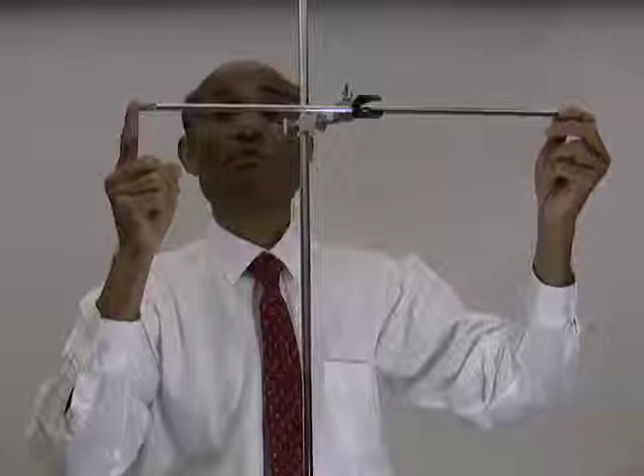No. Therefore, what is the condition that needs to be satisfied in this case? Well, the force I apply on the right side upward produces a torque, rotating this rod in the counterclockwise direction. It is a counterclockwise torque.

And the force that I apply downward here is also producing a counterclockwise torque. That means these two torques will add up to give you a net torque. If this has to remain in equilibrium, the net torque has to be 0.

So before we write these things down, let's talk about this one more time. When you talk about equilibrium of an object, the object may remain in a state of equilibrium with respect to translational motion, also with respect to rotational motion. In order that an object may remain in a state of equilibrium, the object should not have any translational motion—that means the sum of the forces acting on the object must be 0.

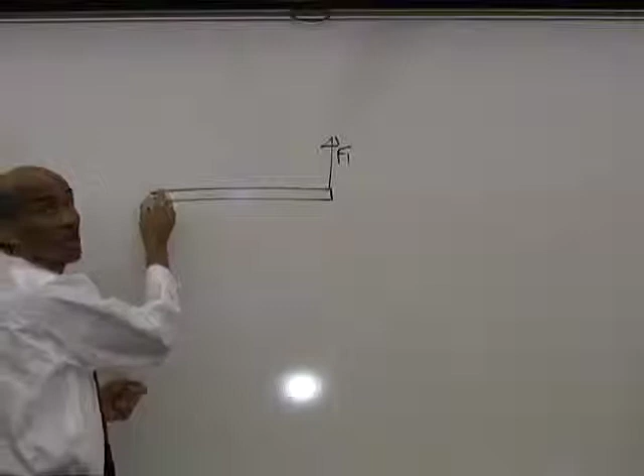Also, the object should not have a rotational motion. That means the sum of the torques of all the forces acting on the object, taken about any point, must be 0. Now, before we go on, let me see if I can draw that situation for you. If I have this object, a force, say F1, acting on this can produce a rotation on this object about this point A.

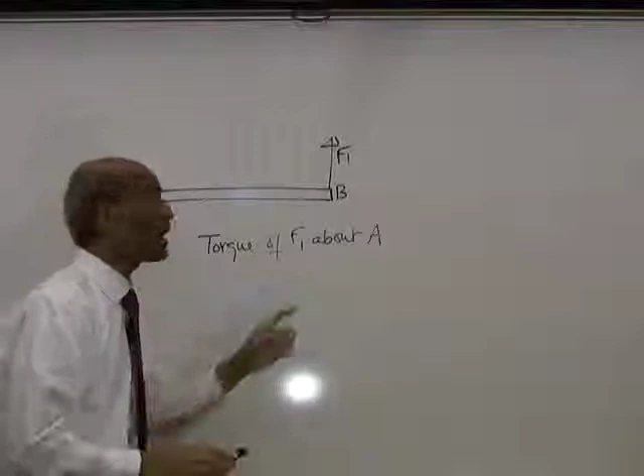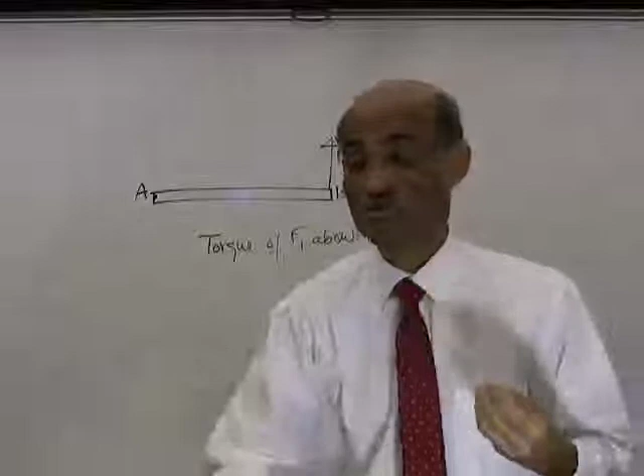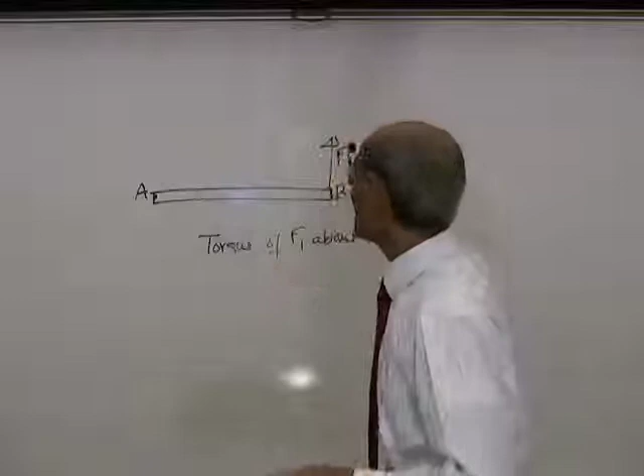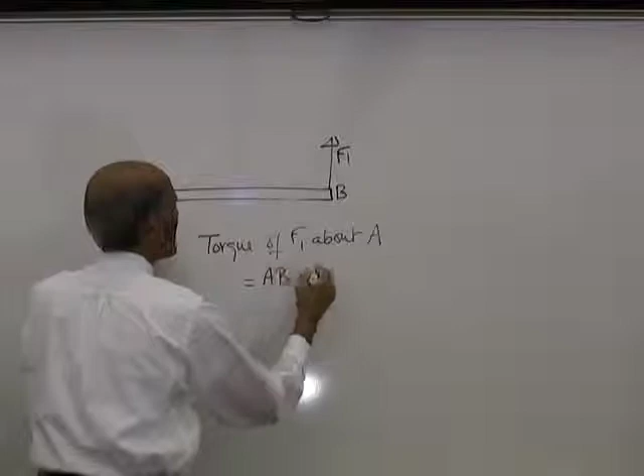The force is acting at point B. Now, what is the torque of F1 about point A? When I say the torque of F1 about point A, what I mean is the torque of the force F1 about an axis that passes through A. Remember, rotation always happens about an axis. So we want to find the torque of this force F1 about an axis that passes through A. What is the torque of a force about an axis? It is the force multiplied by the perpendicular distance between the force and the point. Therefore, this torque is the distance AB, that is the torque arm, multiplied by the force F1.

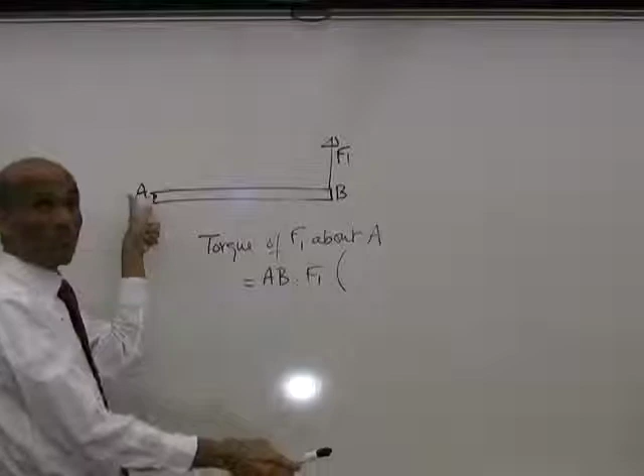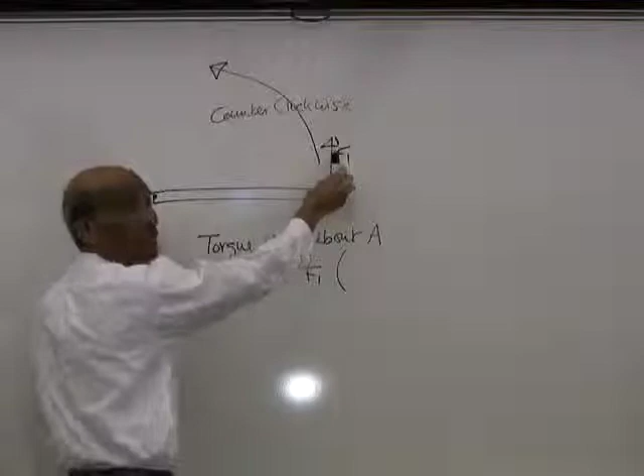Now tell me, what is the direction of this torque? A torque can produce a clockwise rotation or a counterclockwise rotation. I'm sure you can now distinguish between these two. Tell me, what kind of rotation is this F1 producing about point A? Watch my right hand - it will look like my left hand for you. I'm going to point at A, that is my fulcrum, that is where the axis of rotation is. Now look at the way F1 is going to rotate. F1 is going to produce a rotation in that direction. What kind of direction is this? This is counterclockwise. Alright, so we say this force F1 produces a counterclockwise torque about the point A.

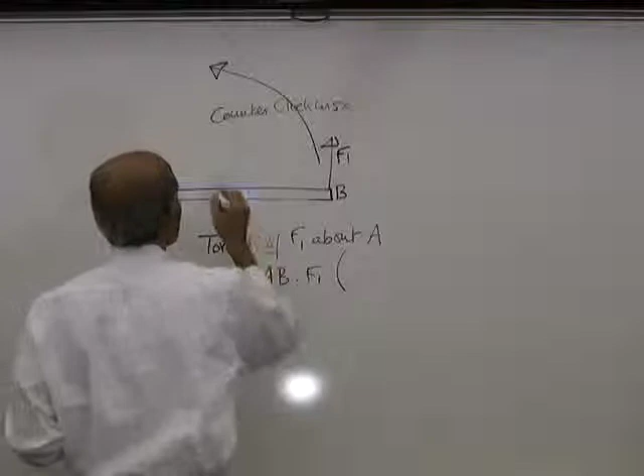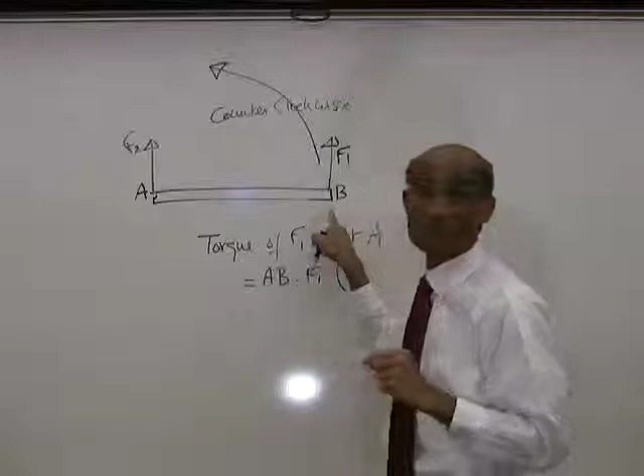Well, suppose I have a force F2 at point A. Tell me, what is the torque F2 can produce about point B? When I say about point B, I mean about an axis that passes through B. What is the torque of F2 about point B? The torque of F2 about an axis that passes through B, it will be the torque arm AB multiplied by the force F2.

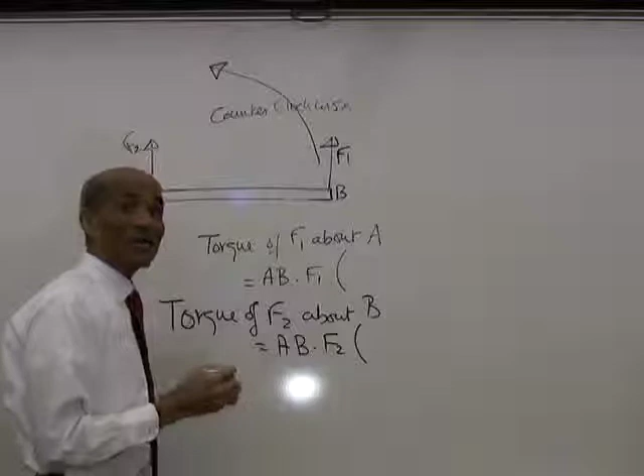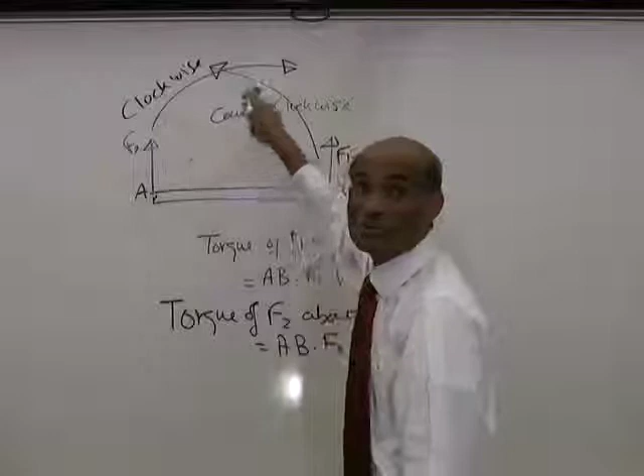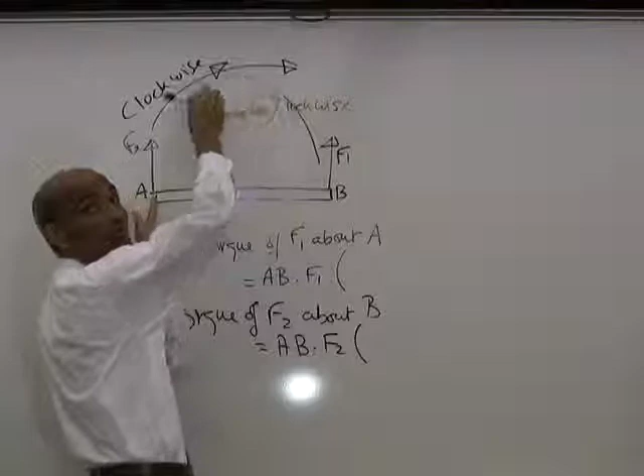Now tell me, what kind of torque is this? If I now hold my finger at B, that is the axis, and rotate the rod using the force F2, look at the way the rotation is going to take place. The rotation is going to be like this. It is a clockwise rotation, isn't it? That is the direction of motion of the hand of a clock. That means the force F1 can produce a counterclockwise rotation about point A, and force F2 can produce a clockwise rotation about point B.

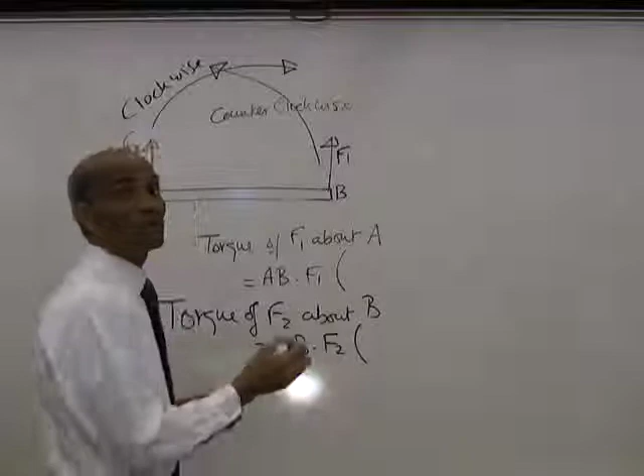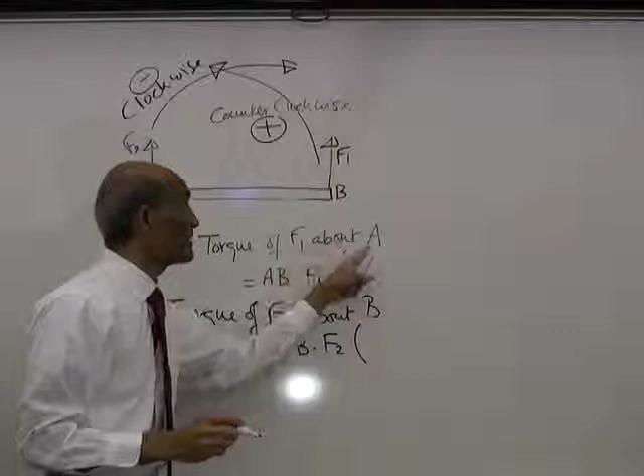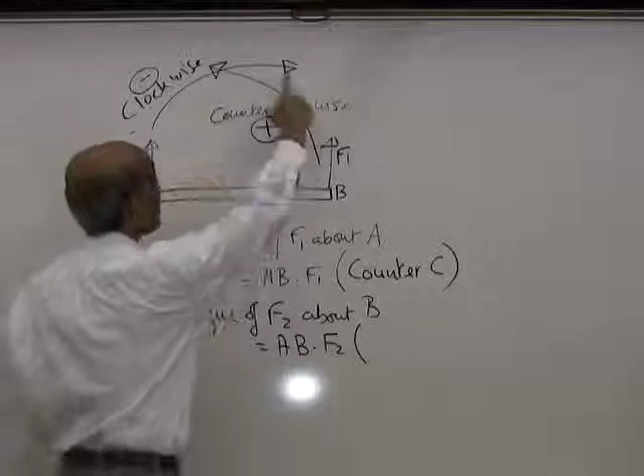That means these two torques oppose each other. So if one is positive, the other will be negative. We can choose which torque to call positive and which to call negative. For convenience, we're going to call the counterclockwise torque as positive and the clockwise torque as negative. So when you want to write the torque of force F1 about point A, it is a counterclockwise torque, therefore it will be positive. If I don't put a sign there, it means it is positive. Whereas the torque of F2 about point B will be a clockwise torque, and that will be negative. So I will now use a negative sign.

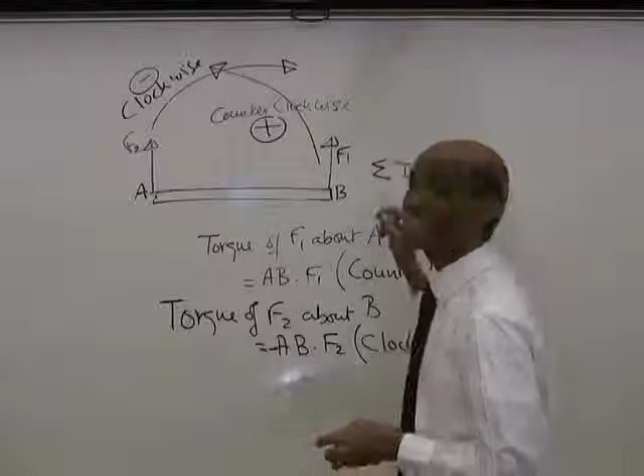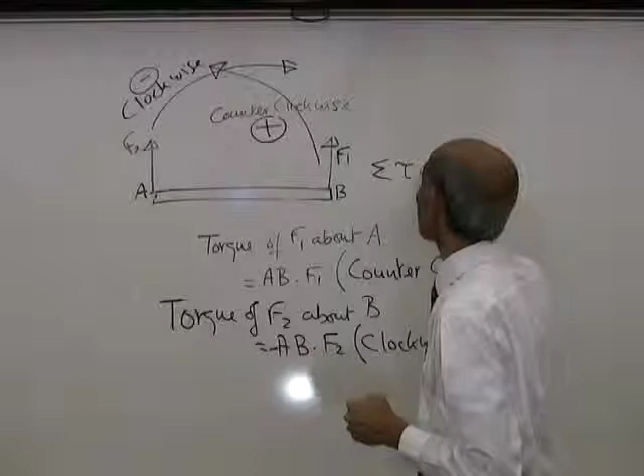Tell me, what is the sum of the torques due to these two forces? In other words, what is the summation of tau? Add these two torques. And if the forces are of equal magnitude, this sum will be 0. Now, if the sum of the torques equal to 0, that means the object will not rotate.

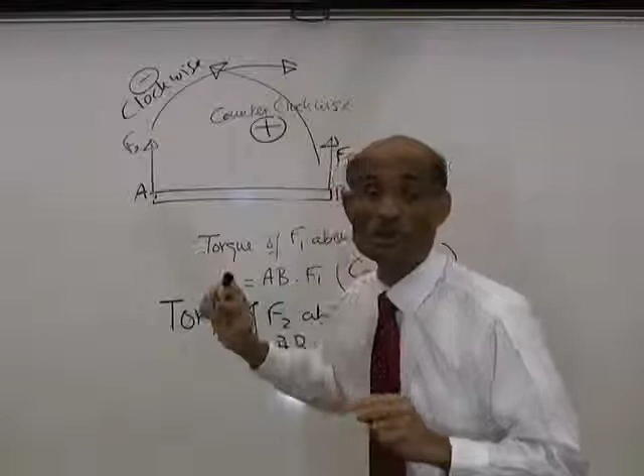So now tell me, what are the conditions under which an object will remain in equilibrium? The conditions are: the sum of all the forces acting on it must be 0, and the sum of the torques produced by all the forces taken about any point must be 0.

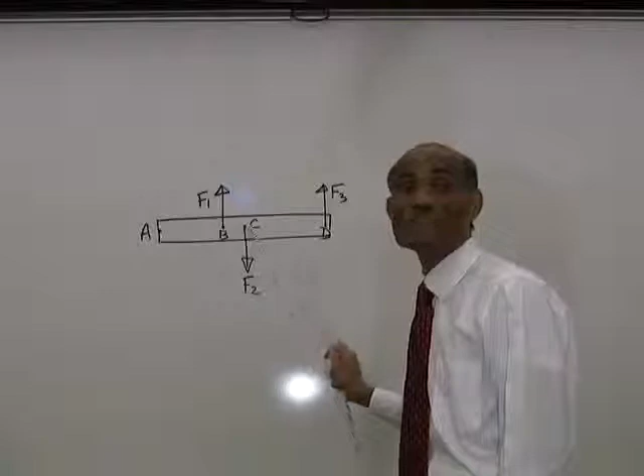Alright, let me try to explain. I have represented a beam here. There are points, I have marked A, B, C and D. And there are forces F1, F2 and F3 acting at points B, C and D. If this object has to remain in equilibrium, it means the sum of the forces must be equal to 0. Now, if an upward force is positive, a downward force is negative.

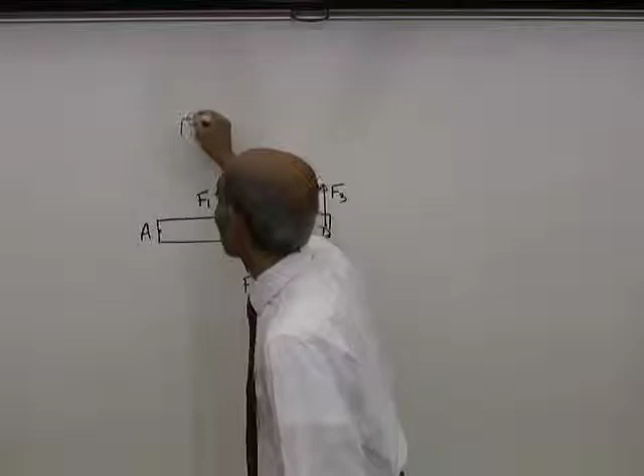So I can then write F1 plus F3 minus F2 equal to 0. This tells me that the sum of all the y forces equal to 0, forces in the y direction. Summation Fy equal to 0 gives me F1 plus F3 minus F2 equal to 0.

Well, that alone will not keep this object in equilibrium. What is the other condition that we need to satisfy?

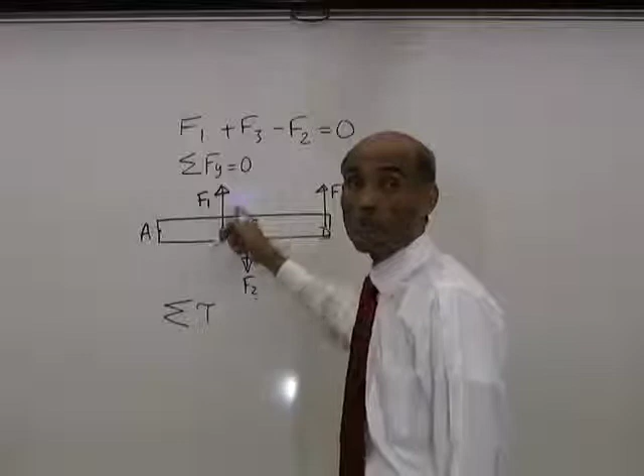We need to add the torques produced by all these forces taken about any axis, because the object cannot rotate about any axis. Here I can take an axis that passes through A, through B, through C, or through D. The object should not rotate about any of the axes.

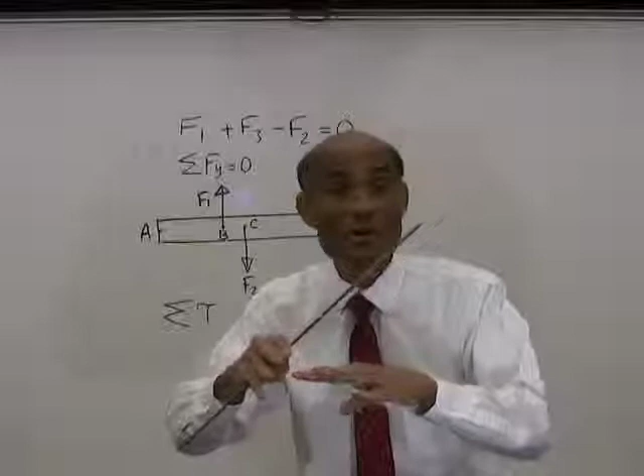That means if you take the torques of all these forces about any axis, the sum of all those torques must be equal to 0.

Now that means we can choose the axis of rotation. We can choose the axis about which the torques of these forces are going to be taken. Any point will be fine. If you choose any axis, the sum of the torques must be 0.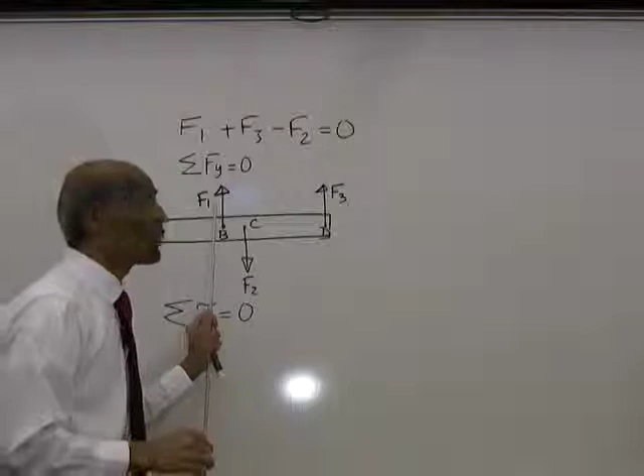Now tell me, what is the criteria for choosing the point? Let's see if you can answer this question. What is the torque of F1 about an axis that passes through this point B? Did you understand the question? What is the torque produced by this force F1 about an axis that passes through the point B?

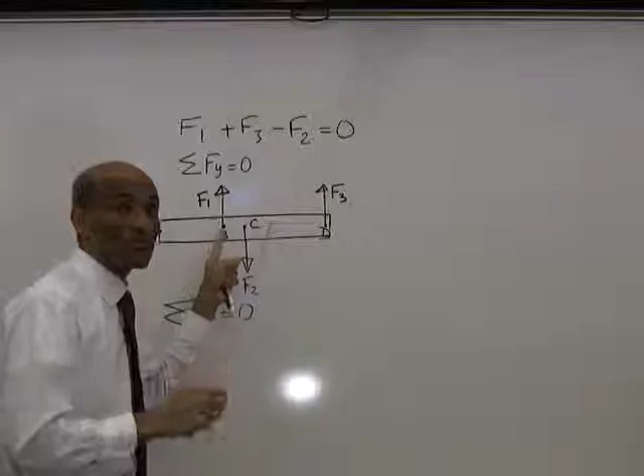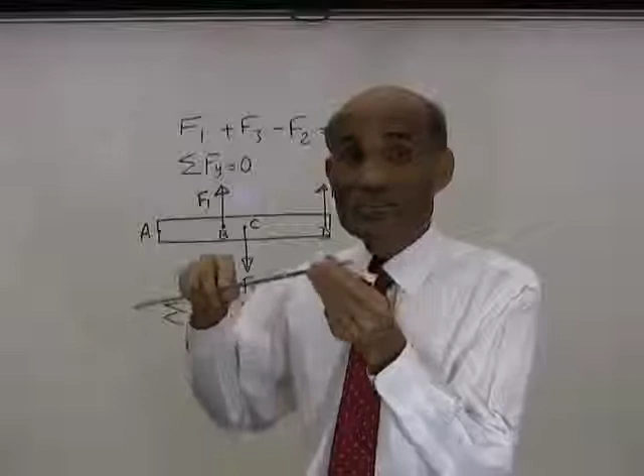Remember, torque is the torque arm multiplied by the force. And the torque arm is the perpendicular distance between the force and the axis of rotation. Now, you can see the axis passes through B, the force also passes through B. That means the torque arm there is 0. So, a very important situation: if a force passes through a point, then the torque of that force about an axis that passes through the same point is 0. It means the torque of F1 about B is 0.

The torque of F2 about C is 0. And the torque of F3 about D is 0. So, we can now take the torque of all these forces about any point.

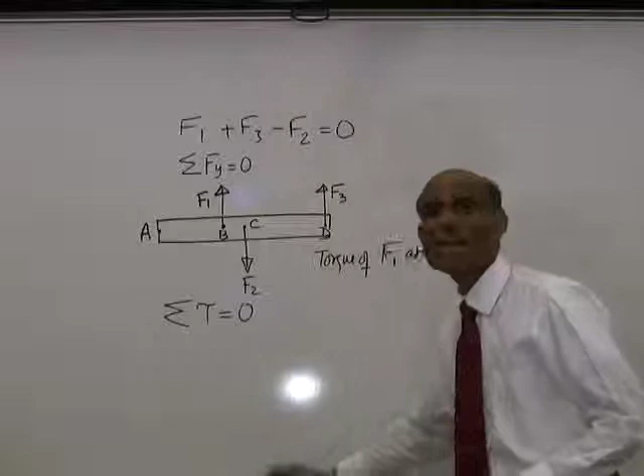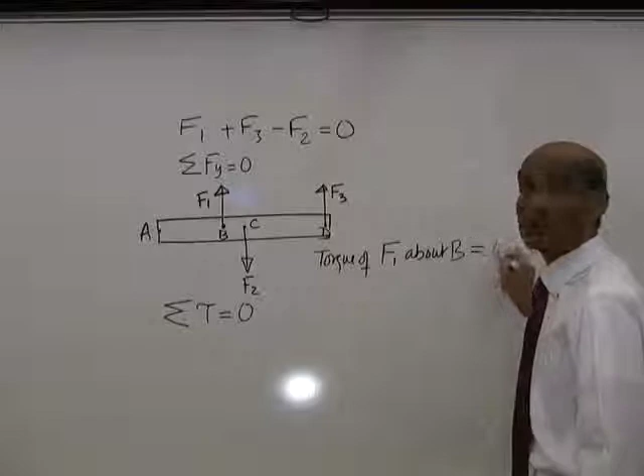Alright, tell me, what is the torque of F1 about an axis that passes through A? What is the torque of force F1 that passes through... what is the torque of F1 about an axis that passes through B? Let's take it about B. What is the torque of F1 about an axis that passes through B? That torque will be 0. Why? Because the torque arm is 0.

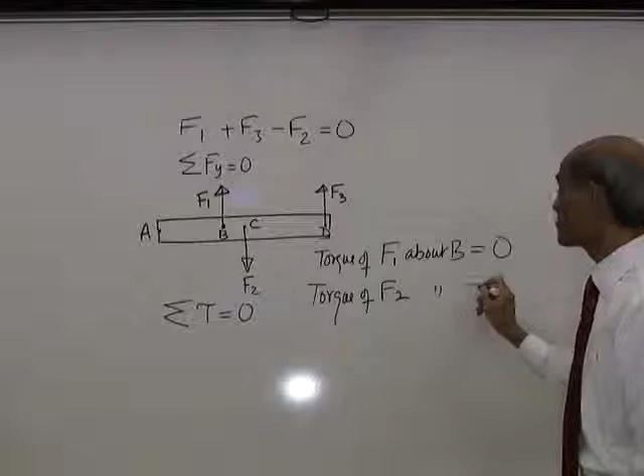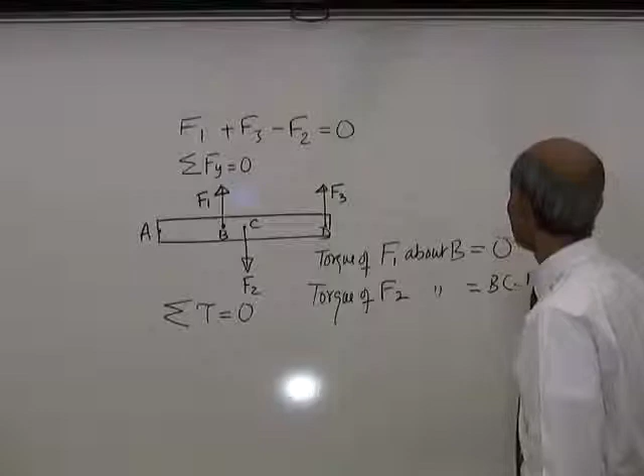Alright, what is the torque of F2 about an axis that passes through B? Torque of F2 about an axis that passes through B, that will be the torque arm, the distance BC, multiplied by the force F2. The torque arm multiplied by the force.

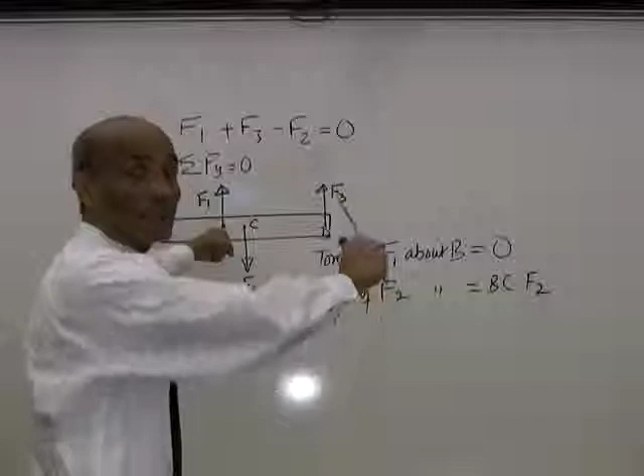Now tell me, is this a clockwise torque or a counterclockwise torque? Well, how do you know? What you need to do is use your index finger and point at the axis. My axis passes through B, there I'm pointing. And then draw a circle using the force around that axis. F2, the torque of F2 about the point B. Look at this. What kind of a torque is it? It produces a torque in the clockwise direction. So this is a clockwise torque, therefore it is negative. Isn't that fair to call that torque negative? It is a negative torque because it is a clockwise torque.

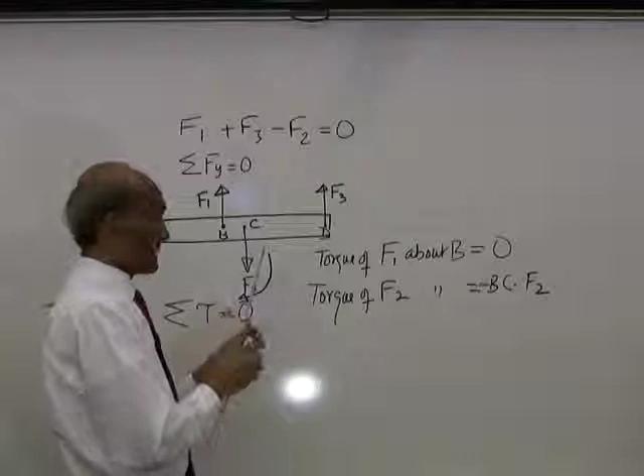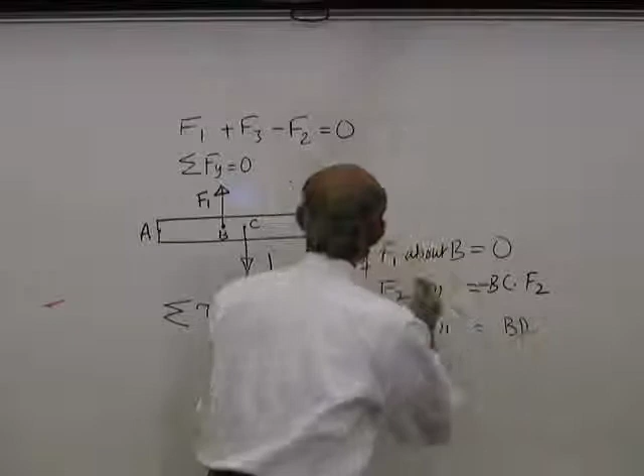Alright, now tell me, what is the torque of F3 about an axis that passes through B? Torque of F3 about an axis that passes through B will be the torque arm, that is the distance BD, multiplied by the force F3. So the torque of the force F3 about an axis that passes through B will be the torque arm, the perpendicular distance between the force and the axis, that is BD, multiplied by the force F3. Now tell me, is this a clockwise torque or a counterclockwise torque?

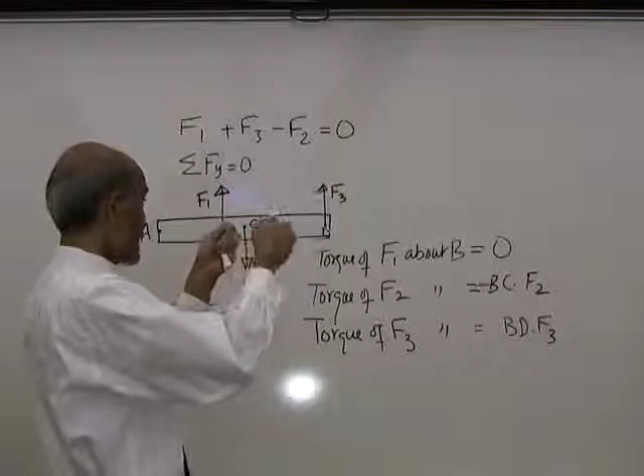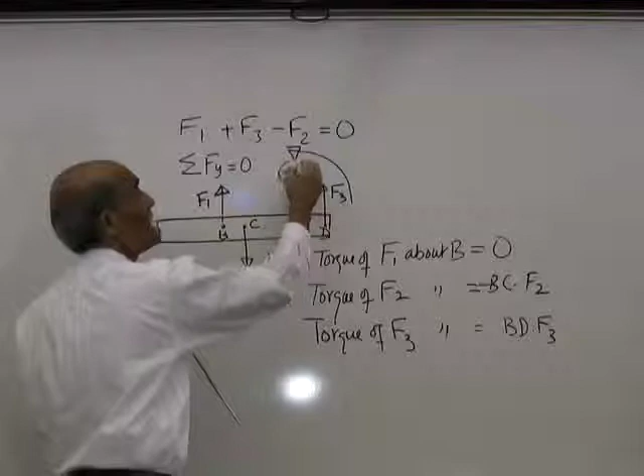This is the axis of rotation about B, and F3 produces a counterclockwise torque, which means it is a positive torque. So this is a positive quantity.

If I now ask you to add the torques, sum all the torques about point B, what would that be? It will be BD times F3 minus BC times F2. Is that right? The torque produced by F3 is positive and the torque produced by F2 is negative.

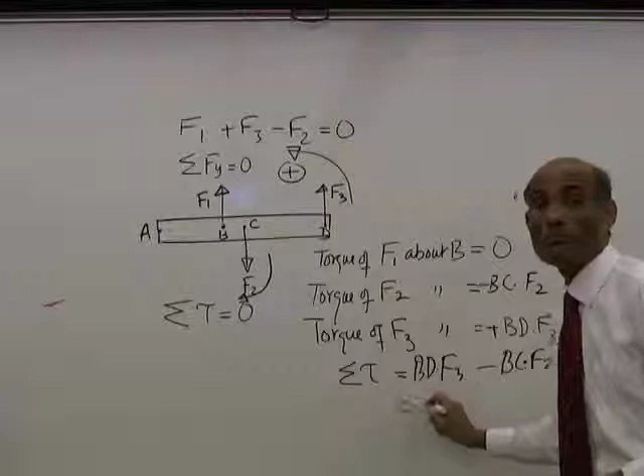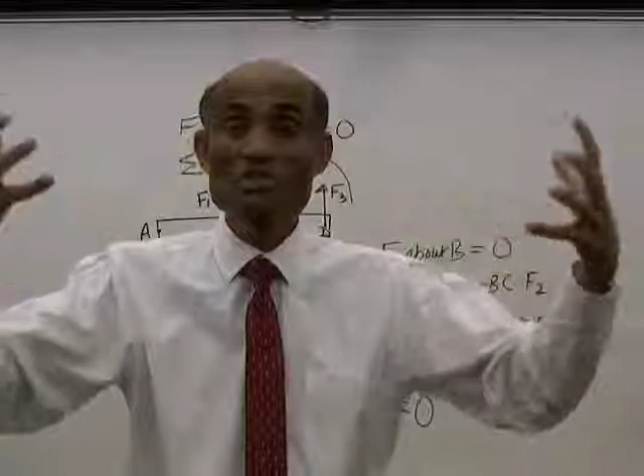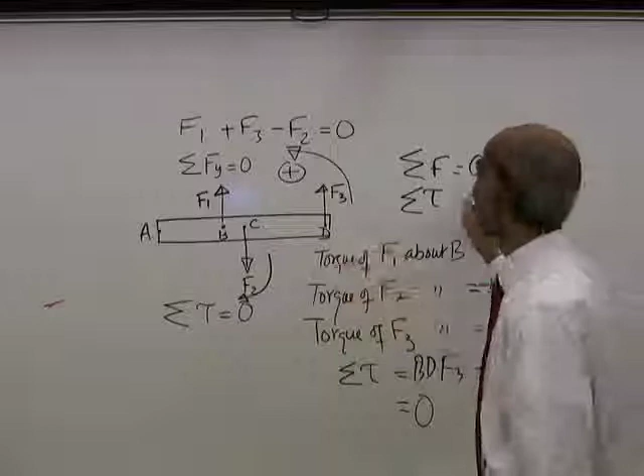And when this beam is in equilibrium, that sum will be 0. This is what we're going to use in solving problems in this lesson. Conditions of equilibrium of a rigid object: a rigid object will remain in equilibrium under the action of several forces, provided that the sum of all the forces on it equal 0, and the sum of the torques of all the forces taken about any axis should be equal to 0.

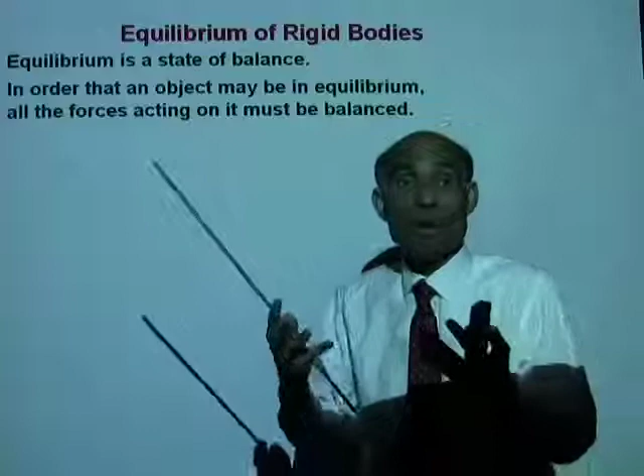Let's now review what we talked about so far. We talked about equilibrium as a state of balance. In order that an object may be in a state of equilibrium, all the forces acting on it must be balanced. That is the first condition. That means the net force on the object must be equal to 0. F net must be equal to 0.

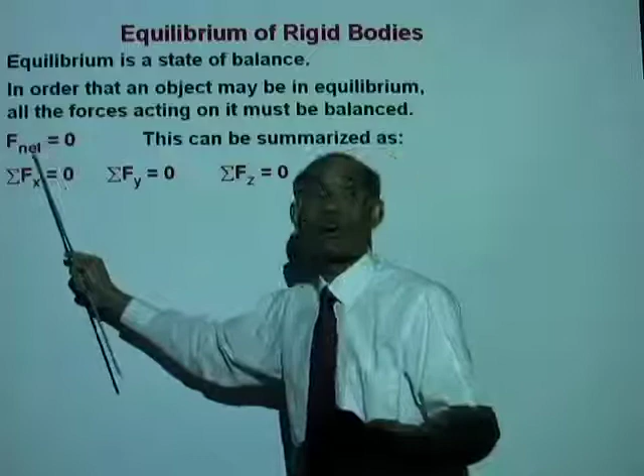I'm going to summarize this as the net force in the x direction must be 0: summation Fx equal to 0. The net force in the y direction must be equal to 0. This is a much more convenient way for us to use in solving problems. Summation Fx equal to 0 means if you add all the forces in the x direction, that sum must be 0. If you add all the forces in the y direction, that sum must be 0. And if you add all the forces in the z direction, that sum must be 0. That is the meaning of the net force acting on the object must be 0.

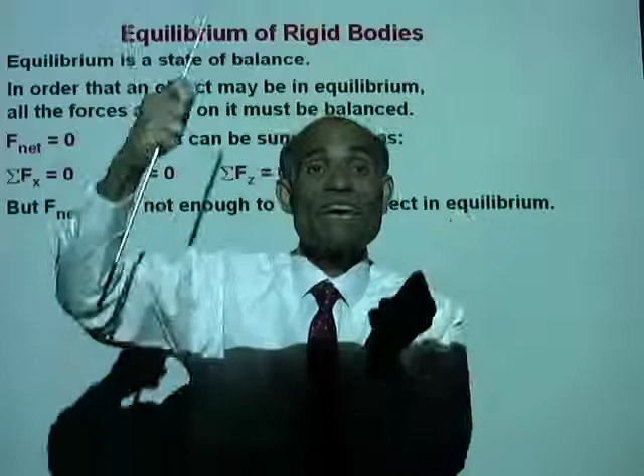So I just demonstrated to you that F net equal to 0 is not enough to keep an object in equilibrium. Why not? Because even when the net force is 0, there could be a net torque rotating the object. Now, when an object is in equilibrium, it has to be in translational equilibrium as well as rotational equilibrium. The object should not move, it should not rotate.

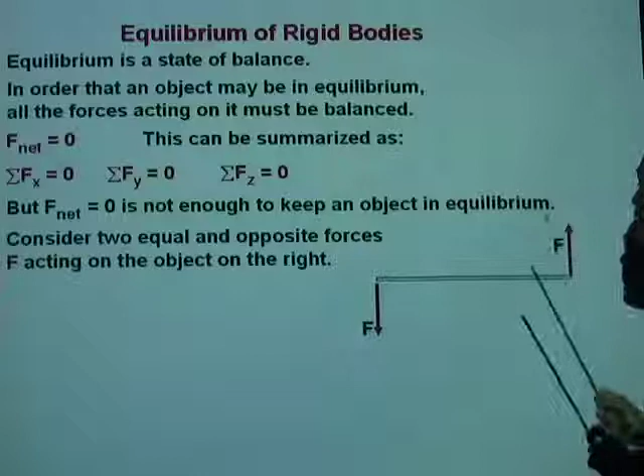So consider two equal and opposite forces acting on this object. You got one force F acting down, the other force F acting up. These forces are balanced, is that right? Because the upward force F minus the downward force, summation of the y forces, is equal to 0. The y force directed up is positive, a y force directed down is negative. The sum of the forces is 0, but the object is not in equilibrium.

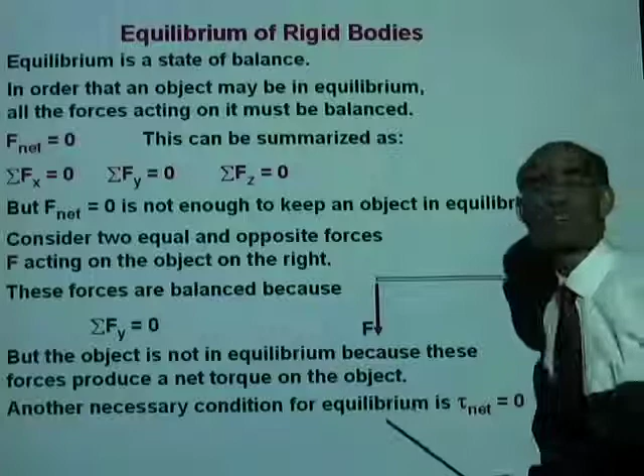Why not? Because these two forces produce rotation on this object. Therefore, another necessary condition is that the sum of the torques of all the forces acting on the object, taken about any point, must be 0 — the object should not rotate about any point. Summation tau net equal to 0 means the sum of all the torques, or the sum of the torques of all the forces taken about any axis, must be 0.

So what are the conditions for equilibrium again? F net equal to 0, which can be written in three forms. Summation tau equal to 0: the sum of the torques of all the forces taken about any axis must be equal to 0.

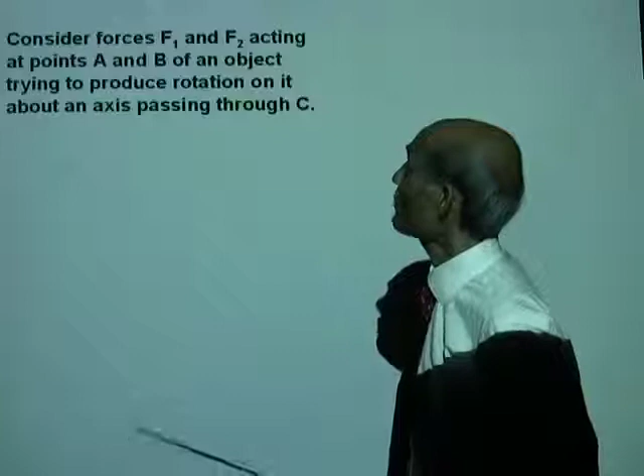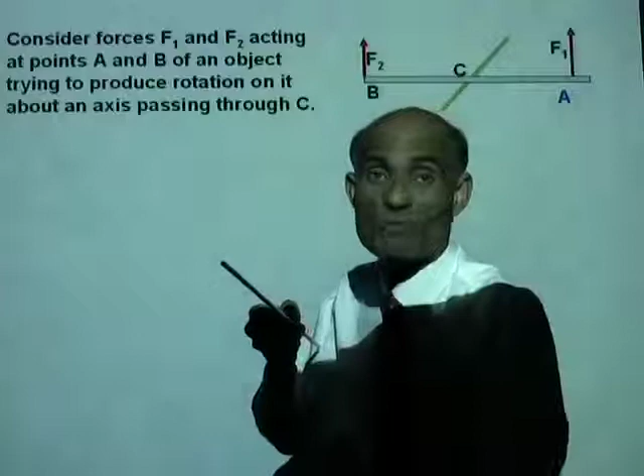Alright, let's talk about rotation for a while. Consider forces F1 and F2 acting at points A and B of an object. Here's an object, that is point A, and this is point B. F1 is acting at point A, and force F2 is acting at point B. Now, at point C, there is an axis, and we are now going to look at the rotation of this object about an axis that passes through C. That's the axis of rotation.

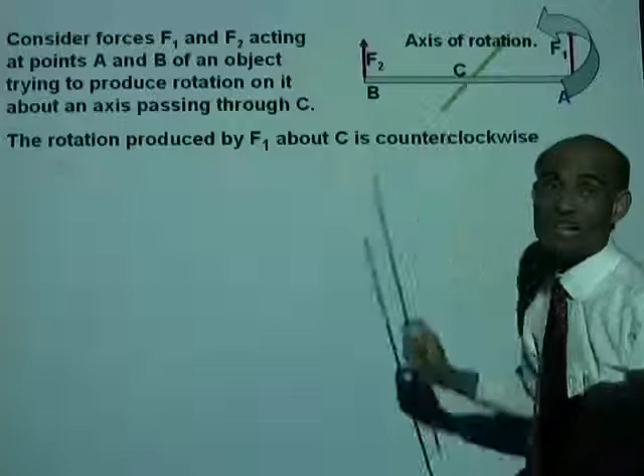The rotation produced by F1 about the axis passing through C is counterclockwise, is that right? The force F1 produces a counterclockwise rotation like this. So force F1 produces a counterclockwise rotation about an axis that passes through C. We call this a counterclockwise torque. The rotation produced by F2, on the other hand, about an axis that passes through C will be clockwise, in the direction of motion of the hands of a clock.

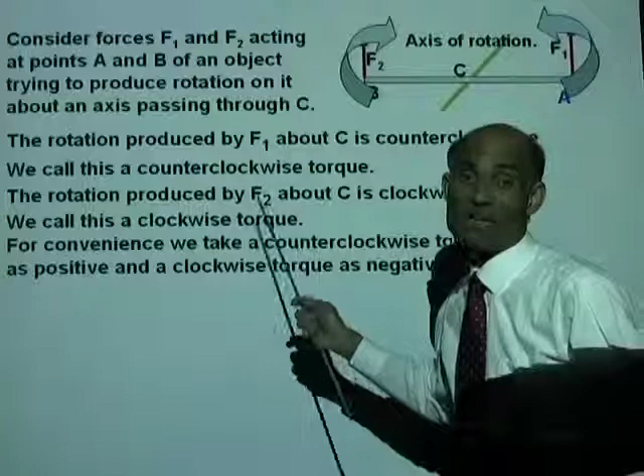And we call this a clockwise torque. For convenience, we take the counterclockwise torque as positive and the clockwise torque as negative. We could have chosen the other way around, but we can only choose one, so we will follow this pattern: all counterclockwise torques are positive and all clockwise torques are negative.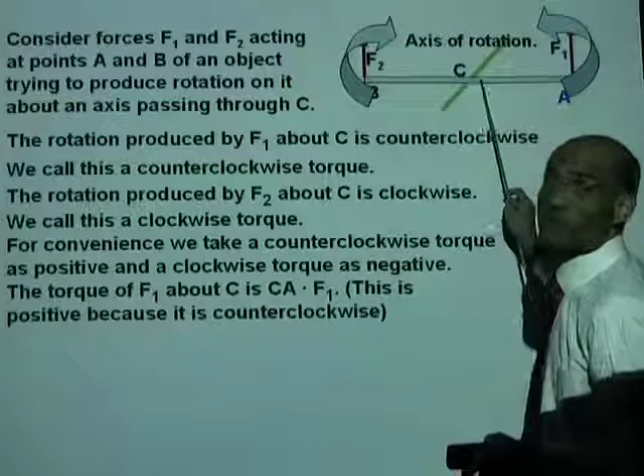Now, what is the torque of F1 about an axis that passes through C? The torque of the force F1 about an axis through C will be the torque arm. The torque arm is CA multiplied by the force F1, so CA times F1, and since this is a counterclockwise torque, it is positive.

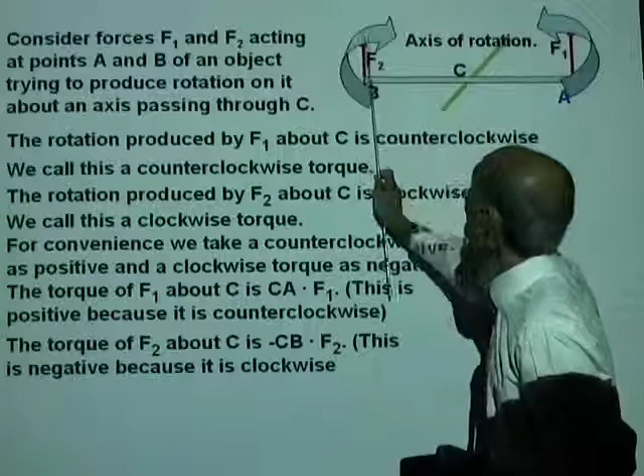Similarly, the torque of F2 about an axis that passes through C will be CB, the torque arm, multiplied by the force F2. It is a clockwise torque, therefore it is negative. I hope the concept is clear because we need to use it to solve problems.

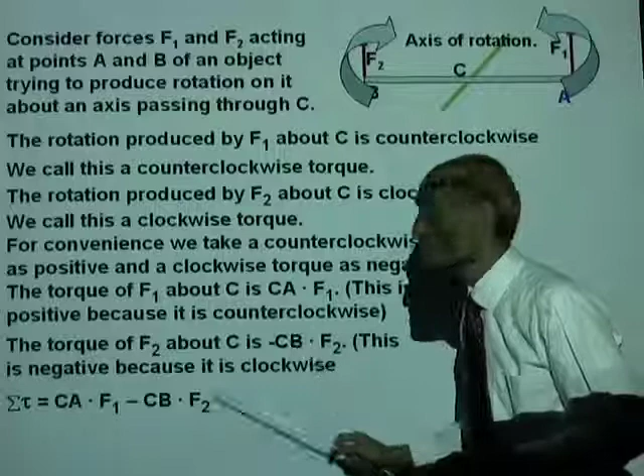Summation of tau: what is the sum of the torques of these two forces about the axis that passes through C? It will be CA times F1 minus CB times F2. This is the sum of the torques. In order that this object may remain in rotational equilibrium, the sum of the torques must be equal to 0.

Let's now talk about another simple concept: what is a couple? It is very often used in our daily life. By definition, a couple is constituted by two things, and in this lesson we are talking about forces, so a couple is a pair of forces. The important thing about this pair is that they are equal in magnitude and oppositely directed.

I showed you an example of a couple a little while ago. I can produce a couple on this rod by applying a force upward at one end and an equal downward force at the other end. Look at that. What does a couple do? A couple produces rotation about an axis.

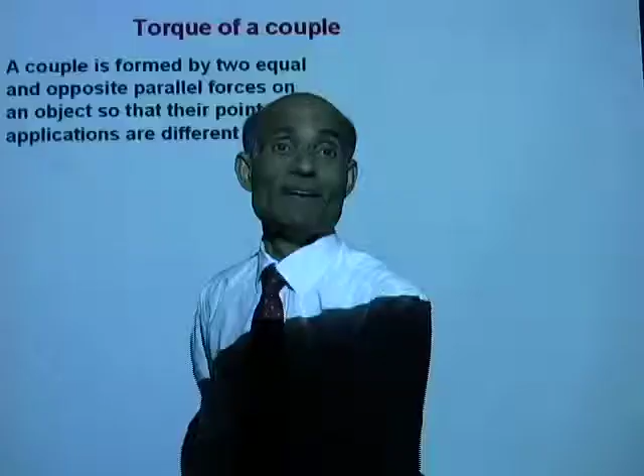Now let's talk about the torque of a couple. What is the torque of a couple? A couple is formed by two equal and opposite parallel forces on an object so that their points of action are different.

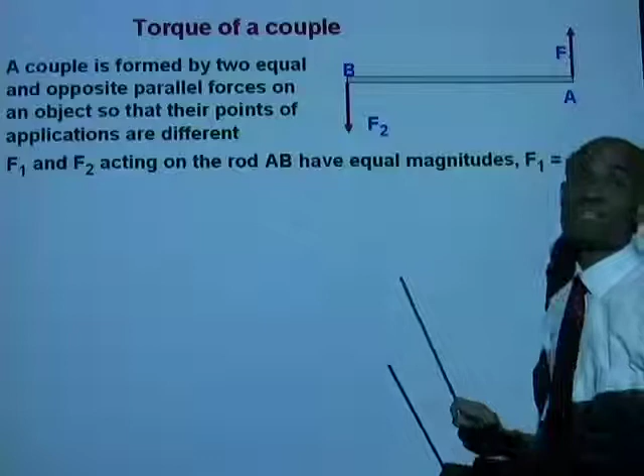Here we have an object, a force F1 is acting at point A and a force F2 is acting at point B. They have equal magnitudes, meaning the length of the arrows are exactly the same, but they are oppositely directed. F1 equals negative F2. Let's take a point C.

We can now find the torque of these forces about an axis that passes through A. What is the torque of the force F1 about an axis that passes through A? The torque of F1 about an axis that passes through A is 0 multiplied by F1.

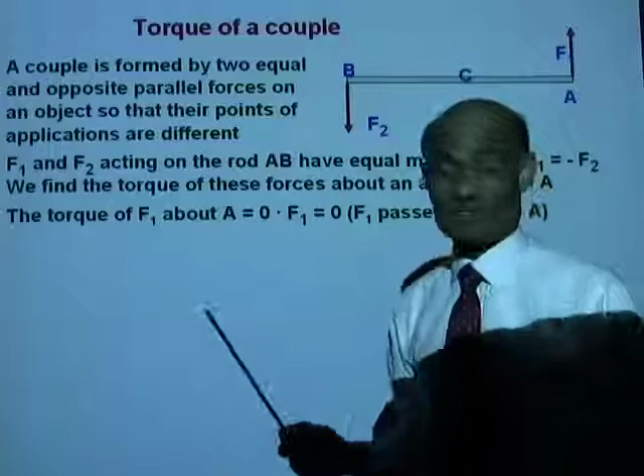Why 0? The torque arm is 0 because the distance between the axis and the force is 0. Now, a very important concept: if a force passes through a point, the torque of that force about an axis that passes through the same point will be 0. The torque of F1 about an axis passing through A equals 0.

What is the torque of F2 about an axis that passes through A? The torque of F2 about an axis through A will be the torque arm AB, multiplied with F2.

Tell me, is this a clockwise torque or a counterclockwise torque? This is the axis of rotation where my pointer is, and see how my finger moves? F2 will rotate counterclockwise. So the torque produced by F2 about an axis that passes through A is a counterclockwise torque.

Well, the torque of F2 about A is a counterclockwise torque. I did that one, but that is not what I wanted. Is that right? I wanted to represent this torque. The torque of F2 about A is a counterclockwise torque.

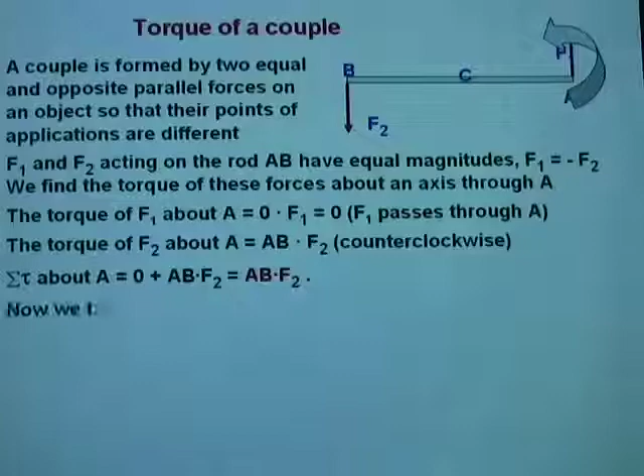We now take the torque of these two forces about the point B. What is the torque of F1 about the point B? The torque of F1 about the point B is the torque arm BA multiplied by the force F1, and that is counterclockwise, isn't it? It is a counterclockwise torque. It is positive.

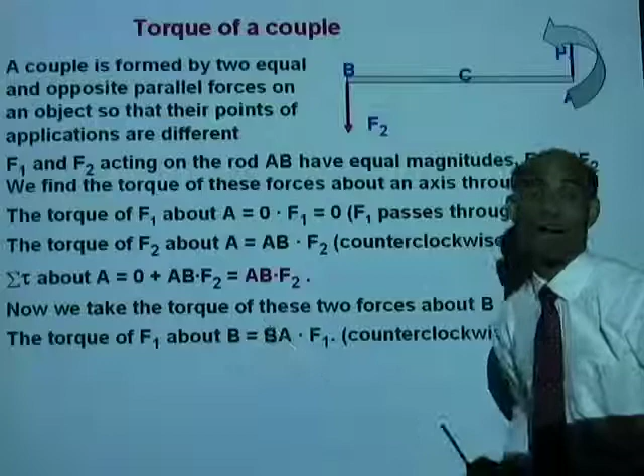Well, I got them the other way around. Okay, the torque of F1 about B is a counterclockwise torque.

How about the torque of F2 about B? This is F2, it got covered by my arrow. This is F2, and this is the point B. What is the torque of this F2 about that point B? F2 passes through B, therefore the torque arm is 0, and that torque therefore is 0.

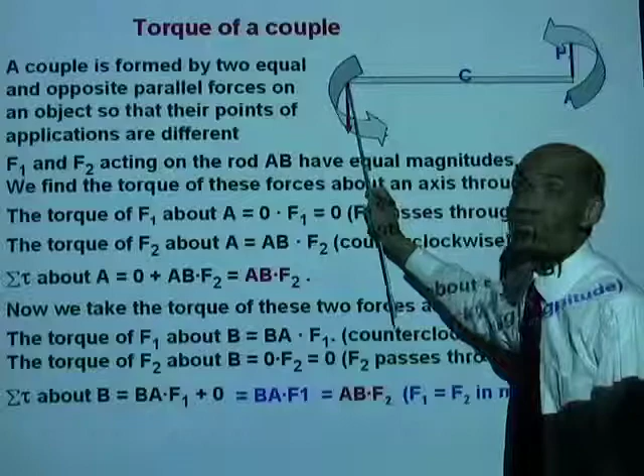What is the sum of the torques of these two forces about B? That will be BA times F1. But isn't BA times F1 the same as AB times F2? Because BA and AB are the same length. So the torque of these two forces, whether you take it about point A or about point B, will always be equal to the torque arm, the distance between the forces, multiplied by one of the forces.

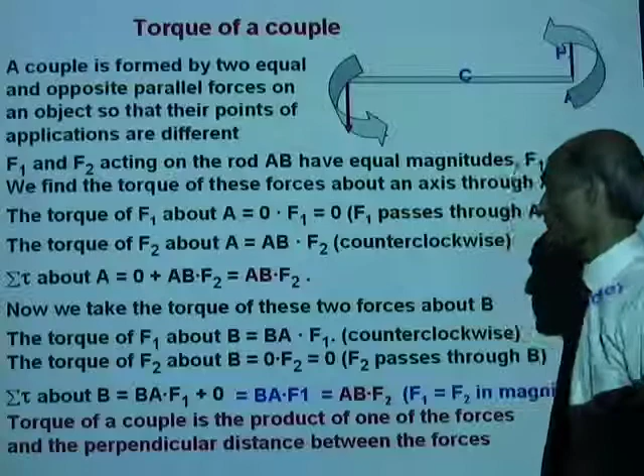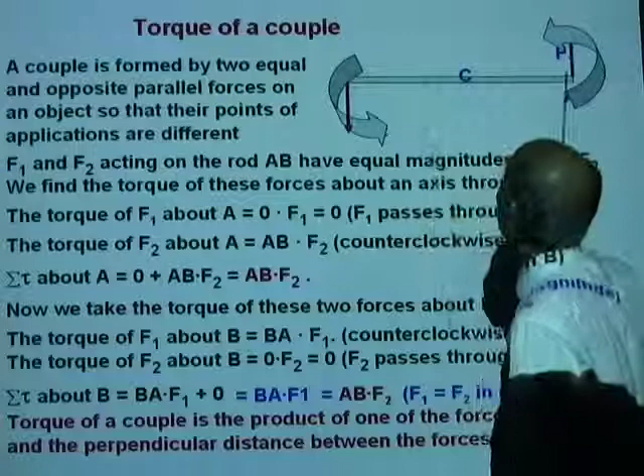Now remember, F1 is the same as F2 in magnitude. So if you want to find the torque of a couple, all you need to do is multiply the perpendicular distance between the forces by one of the forces, and that will be a measure of the torque of the couple. Torque of a couple is the product of one of the forces and the perpendicular distance between the forces. For a couple like this, the torque of a couple is the product of one of the forces and the perpendicular distance between the two forces.

Alright, now I'm going to stop this part of the lesson here. We will use these concepts that we developed in solving problems in the next part of the lesson. Alright, I will see you for that in a minute.